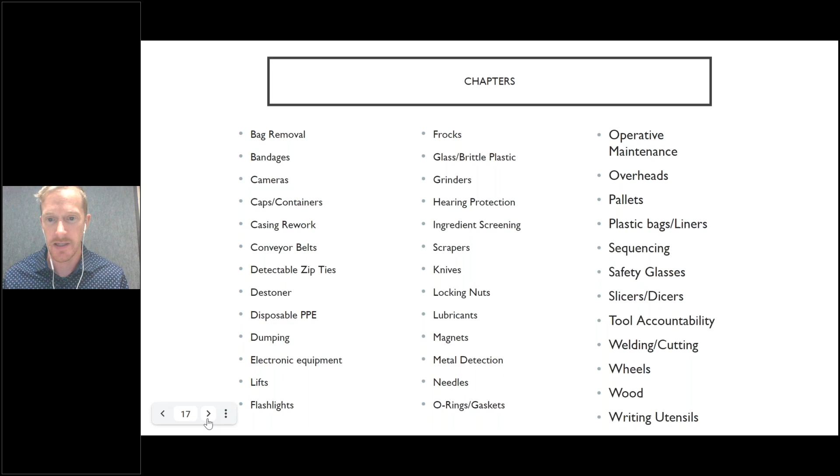But when it comes to these chapters and all these responsibilities, who do you think is responsible for executing these requirements? It's not us sitting in the corporate office, you know, writing them. It is our operators on the production floor. So all of these chapters, all of these expectations involve an individual, one of our valued team members. They have a responsibility while they're making our products to do some of these checks, to make sure that we are keeping out foreign objects and making safe product. So that drove our need to really talk about culture and focus on culture.

I don't have the magic bullet or the magic answer when it comes to this, and I'm going to talk about that in a little bit here. But I do want to share some of the things that we focused on and some of the process improvements that we made across our organization in regards to culture. We branded our food safety program. We standardized monthly food safety training and had that available in multiple languages. We have 16 different languages that are spoken across our manufacturing facilities.

We have food safety animated training video content, and that video is with our food safety mascot, Silver and Ware. And we celebrated our current food safety heroes. So we launched Food Safety Awareness Week in May, and every single year that week is dedicated to celebrating all of the amazing things our team members are doing across our plants in regards to food safety. So here's some pictures of some of the training. There's Silver and Ware, our food safety superhero. We actually make T-shirts and capes for the heroes that we're celebrating.

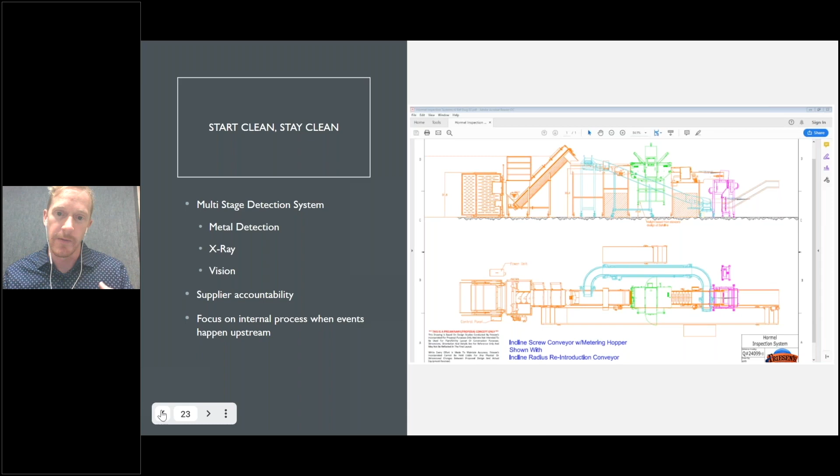But we can also focus on supplier accountability, so driving corrective actions with our suppliers. And here is where we are truly implementing this multi-stage detection system. We are using metal detection, we are using X-ray, and we are using a vision system of some sort to get a full picture of the objects coming into our process.

And when it comes to that system, metal detection and X-ray are primary forms of detection that we have across our plants. Another thing that we are doing is really looking at and truly understanding the capabilities of that machine when that product runs through that metal detector and that X-ray, and we're doing the same thing with our vision systems as well, working very closely with our vendors. This is exactly what Olga is going to be talking about in a little bit, but truly knowing what that machine is doing for your process.

There's a couple of things that we do internally, and that's focusing on the balance between probability of detection and false reject rate. Probability of detection is knowing what the lowest seed size is detectable, and detecting that seed size 100% of the time. You may have a target, and what we've realized and told ourselves is it's okay if we don't get to that target. It's okay if we don't get to 1 millimeter. We want to know what the true capabilities are, and let's detect at that level. At the same time, you don't want to go too sensitive so that you're having false rejects.

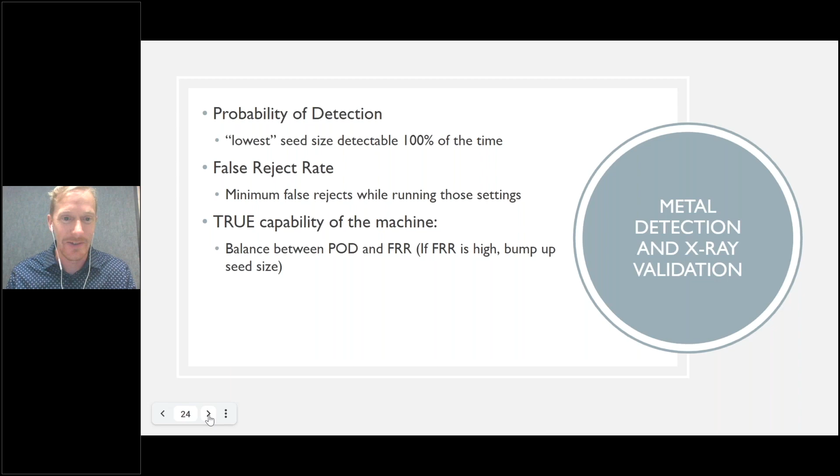Another thing that we discovered as we were investigating these recalls is some of our machines had a very high amount of false rejects. Our operators running those machines were then losing their confidence in the machine itself, and not thinking that there was actually foreign material being detected. So you want to find that balance, have minimum false rejects, and truly know how low it can detect to. I think I talked about all that already.

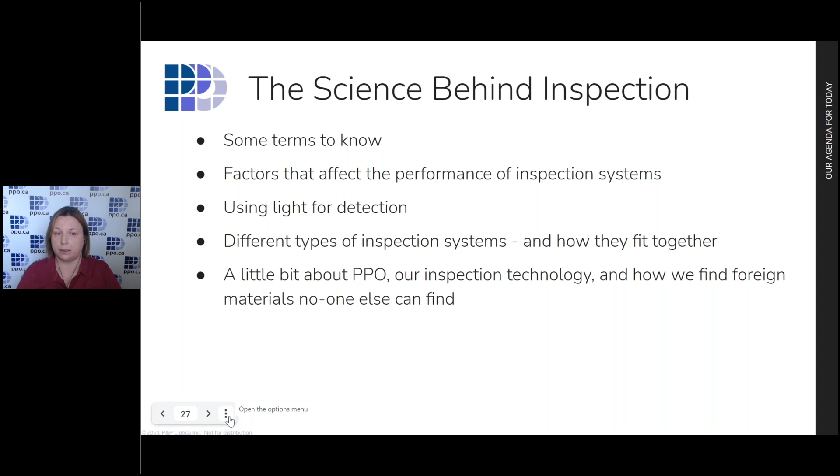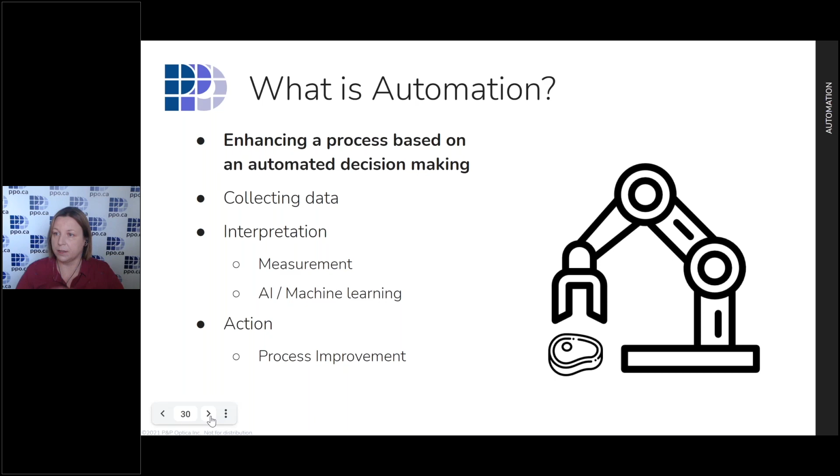So detection is not just the ability to see something. Not only do we have to see it, we have to make a decision whether something has occurred, or measure that something, and actually make some sort of recommendation. It's not sufficient to just see that something happened. And automation takes things even further. Automation is supposed to help us to enhance the process and automate decision making. So we see, we think, we make a decision. And all of that is really important in how we collect information and how we can act upon it in a plant.

But stepping back a little bit, what we consider as an event, like a foreign object coming into the stream, is really a mathematical concept and also a reality of what can be done in a measurement system. So consider something like having a medical condition or a presence of foreign material in the stream of production. The reality is that either something is true or something is false. However, when we go to measuring that, no measurement is perfect. So instead of seeing something that might be true, we might also see false positives or false rejections occurring.

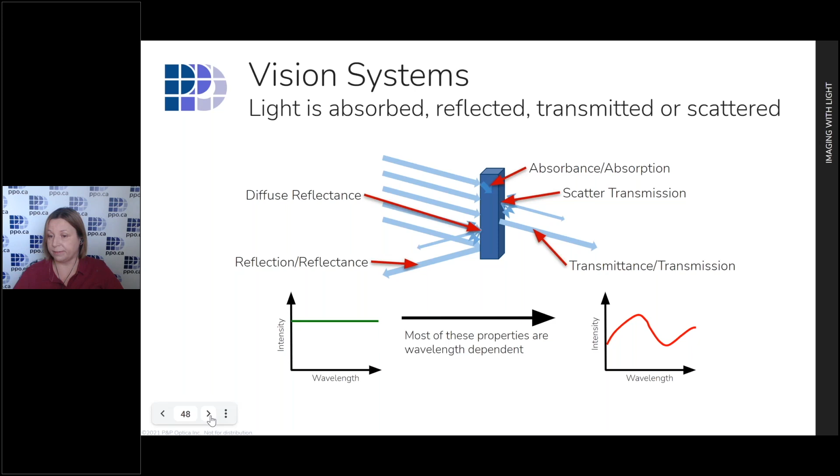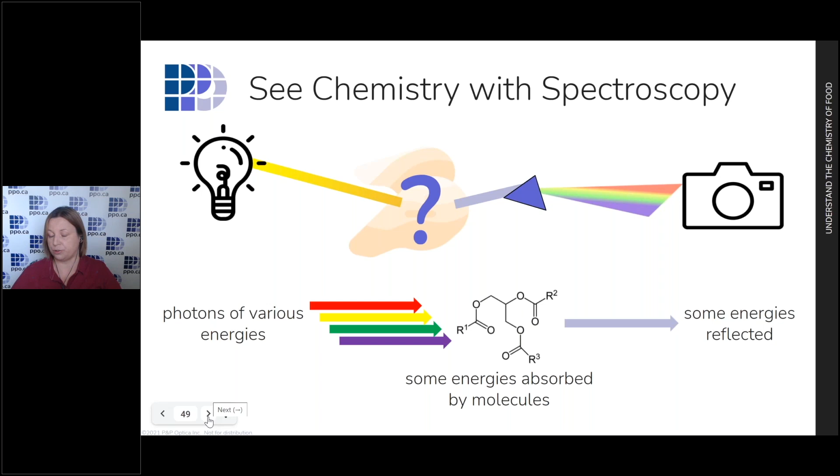So we can use that wavelength dependency to implement the science of spectroscopy into detection of foreign objects. Based on the molecular structure and strength of molecular bonds inside of your product, different wavelengths of light will be absorbed differently, and therefore we can detect those changes and actually tell you what the chemistry of your product is. And vision systems have been using that for a long time.

Frankly, your eyes are a very rough spectrometer because we see three colors. We can interact with the environment and kind of make predictions on what things are made out of. So from the fact that grass is green, you can infer that it holds chlorophyll, because the chlorophyll absorbed all the colors of light and only reflected green.

So camera systems are exactly that. They're a copy of our eyeball, and they see three color bands, blue, red, and green, and collecting those three channels allows you to differentiate some foreign objects. So for example, a lot of typical vision systems are much better at seeing blue plastics in the production line than other things like white plastics or cardboard, which start blending in with the background, and there's just not enough information to differentiate those objects.

So what people have done is, okay, well, if three color bands are great, let's use more color bands. So we now have something called multispectral imaging systems, which look at maybe 10, 20 color bands that are specifically selected for the objects that you want to be looking at, and now you can differentiate those objects better. So maybe one plastic will have a band that's a little bit stronger in this blue and that green, for example.

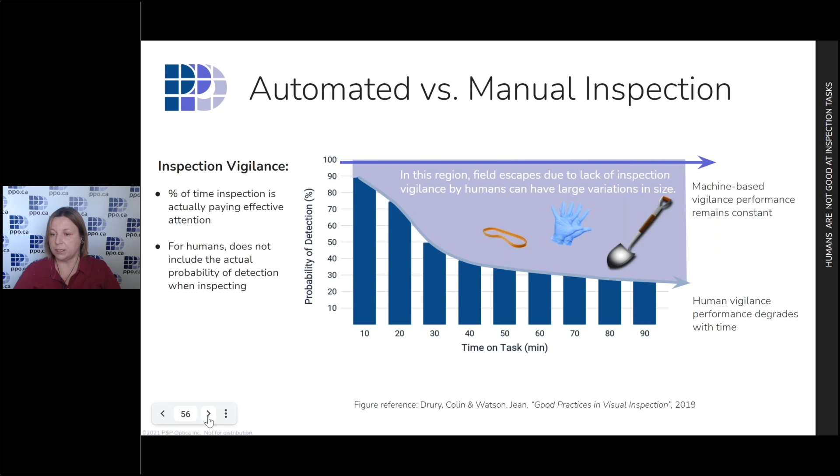dramatically with time. Human performance also depends on the organizational structure. So if they're trained well, if they're supported well, if they're rewarded well, that influences it. Obviously, environment, ergonomics, temperature affect human performance. So there is a tremendous amount of variability in how humans perform from day to day. And that's why automation and introducing new technologies is such a good idea.

X-ray machines have been a workhorse of this problem, and they're excellent at finding some types of foreign objects. They're very well understood. They have parallels in medicine. It's relatively easy to implement them. The problem is that they cannot see low density materials. So things like cardboard, like certain types of plastics, cannot be seen by X-rays. The benefit is that X-rays see bulk material, so it's not a surface-only measurement.

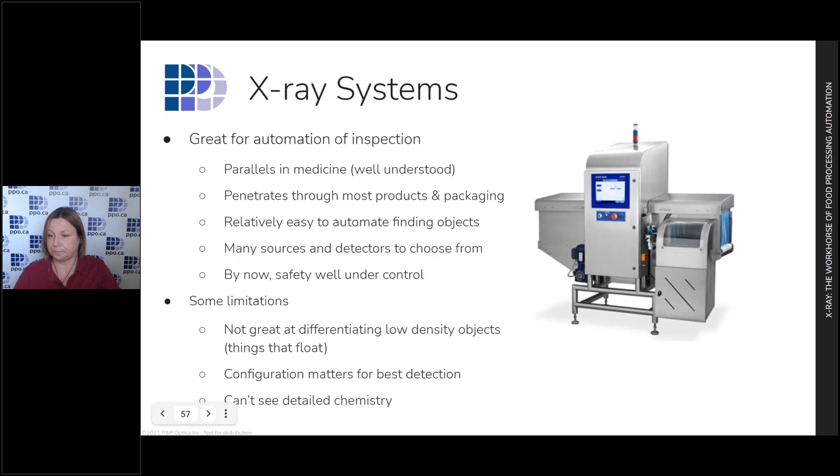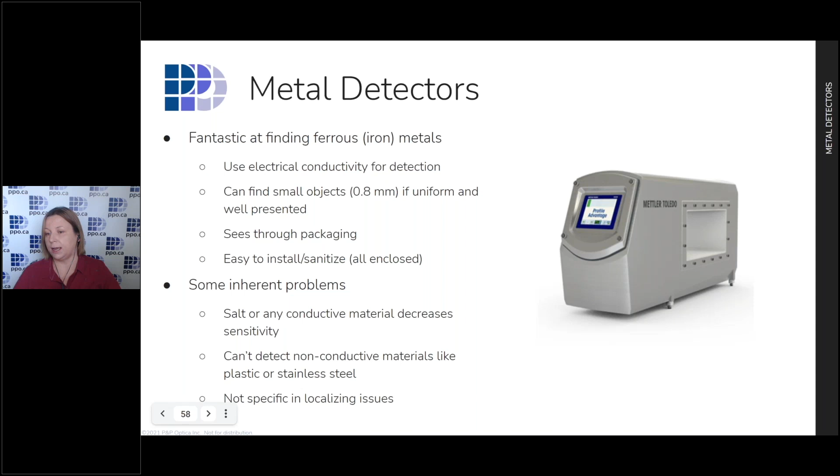Metal detectors, also something that you probably are very familiar with, use electrical conductivity for detection, can see some very small objects, but are affected by a lot of external factors. So salt, for example, in your product will affect the ability to detect things. They cannot detect, obviously, anything that's not conductive, and actually have a pretty hard time detecting where a particular foreign object is located, so they require additional search and handling of the product.

Camera systems are now entering the market for food imaging, especially meat, and can see much finer details than X-rays or metal detectors. Color often represents chemical information. They're relatively inexpensive and quite safe. And there are so many non-food applications that the ecosystem of knowledge is very high. The problem is the visible light methodology is very dependent on the surface, and low contrast images are very difficult to process and see foreign objects.

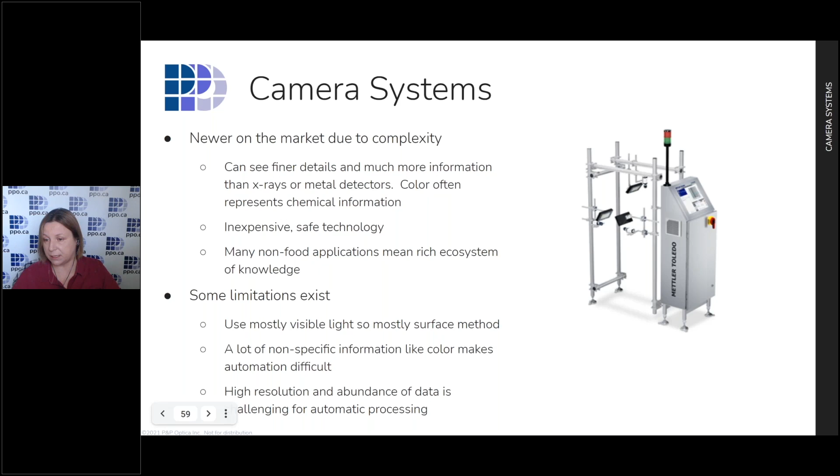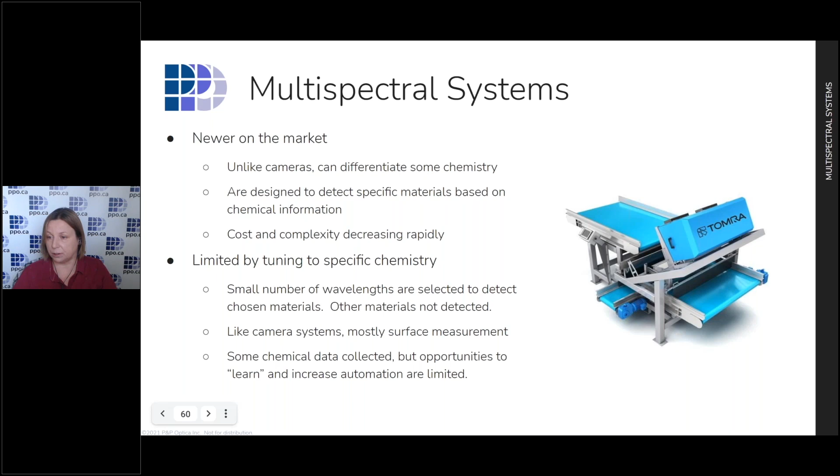There is also much more pressure on vision systems to perform complex calculations much faster than something like metal detectors or X-rays. So the technology is just catching up to very high-speed applications like food processing. Multispectral systems, again, I talked a little bit about that, see more materials, have more data to collect, but the problem is they're tuned to a specific material or two that can be detected.

And finally, we have the hyperspectral systems that can see the chemistry of the food as it's being processed, and have really hit their stride over the last decade or so, where computing power and AI and machine learning have enabled us to actually process tremendous amounts of information quickly enough to make decisions in a plant setting.

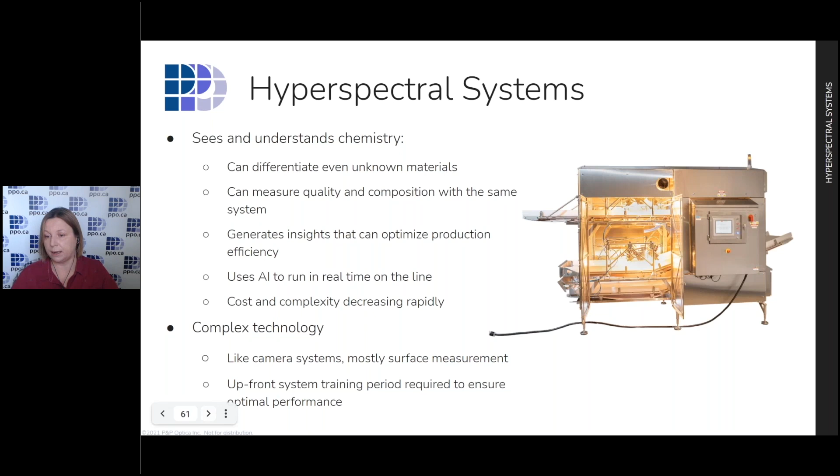So at PPO, I foreshadowed quite a bit of the discussion, but we use hyperspectral imaging to help with automation. We've worked on this technology for multiple years, but it's really a combination of exceptionally good spectrometers that can provide a lot of information in fractions of a second, and then processing that information with machine learning and AI technology to really interpret this vast amount of information into something actionable. Yes, there is a problem with your product. It has a foreign material, or is low quality, or has the wrong composition, and we can immediately reject it into a bin or a side conveyor belt.

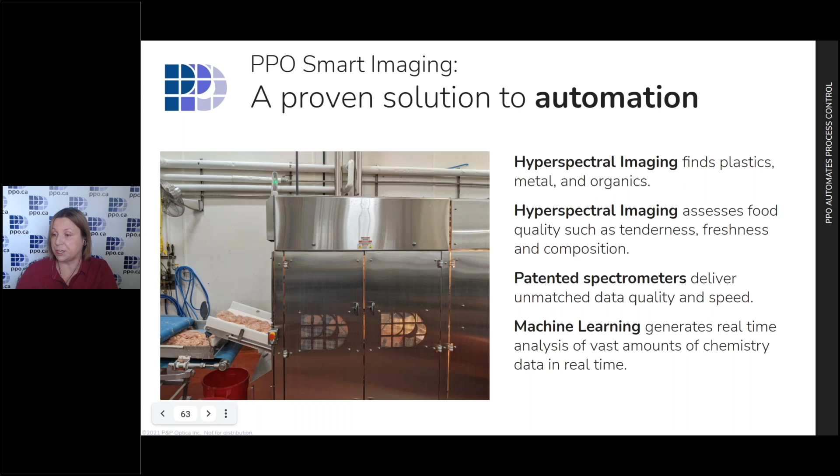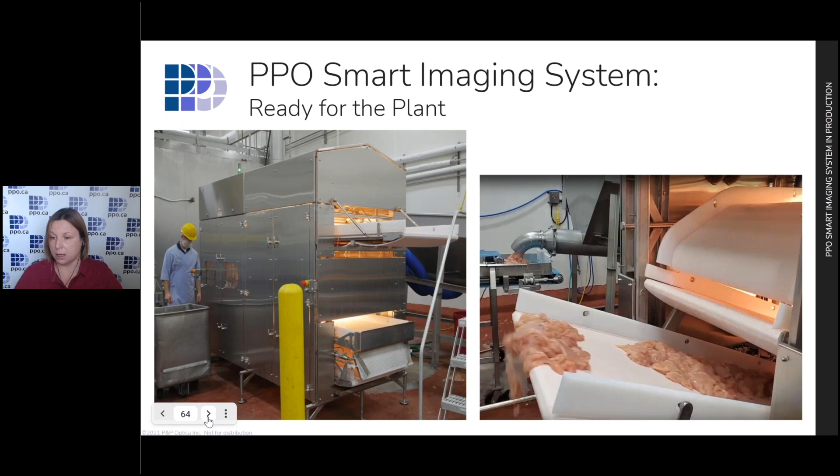So we really provide a much richer experience and much more information about the foreign materials, but the same machine at the same time can give you chemistry information. So what is the composition of this patty, or is this pork or beef, or what's the quality of something like a chicken breast? So those are the problems that we're solving now more and more.

And again, that close relationship between us, the vendor, and you, the quality control people in the plant, is very important. Having an open discussion, understanding each other's limitations and problems really enables us to provide a solution that's super flexible, learns continuously, and provides great protection against the unforeseen presence of foreign objects.